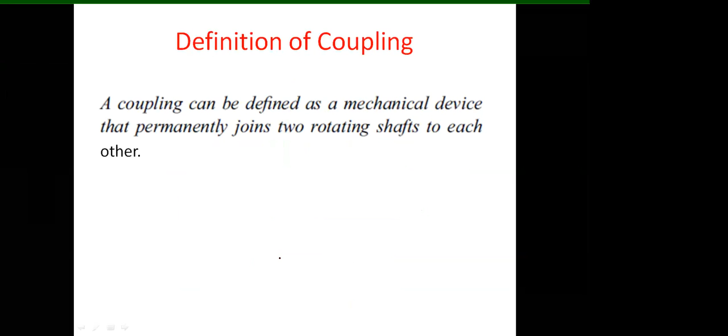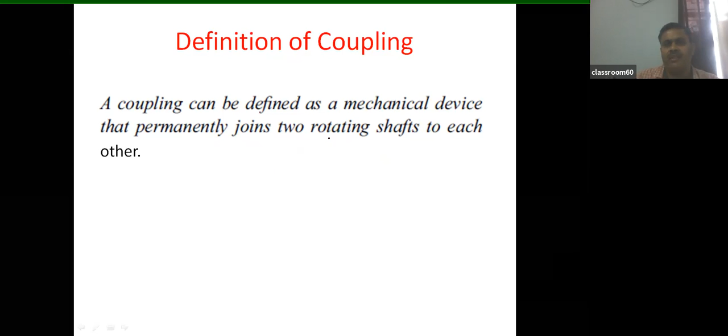First, let's define the coupling. A coupling can be defined as a mechanical device that permanently joins two rotating shafts to each other. The shafts may be collinear, parallel, or at some angle. So the coupling joins both shafts so that power can be transferred from one shaft to the other. That's the basic definition.

So here this is shaft number 1, shaft number 2. With the help of a muff, also called a sleeve, it is basically a hollow shaft you can consider, just like a hollow shaft. So shaft 1 and shaft 2.

Shaft 1 is the input shaft, connected with the motor, so it is rotating. On this shaft there is a sleeve, this hatched portion. A key is fitted in between the sleeve and shaft number 1, this is the key. When shaft 1 rotates, power is transferred with the help of the key to the sleeve, so the sleeve also rotates. When the sleeve rotates, because the key is also connected with the second shaft, power is transferred from the sleeve to the second shaft with the help of that key.

So the elements of the coupling: there are two shafts required, one input shaft and one output shaft. This is the output shaft, and this is the length of the sleeve, given by the empirical relation 3.5D. This is the key. So shaft, sleeve, and key are the basic components of the muff coupling.

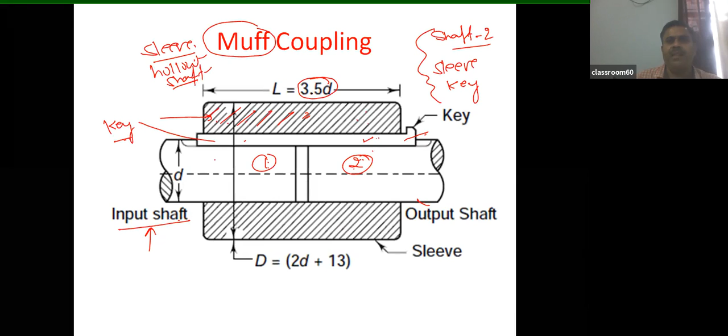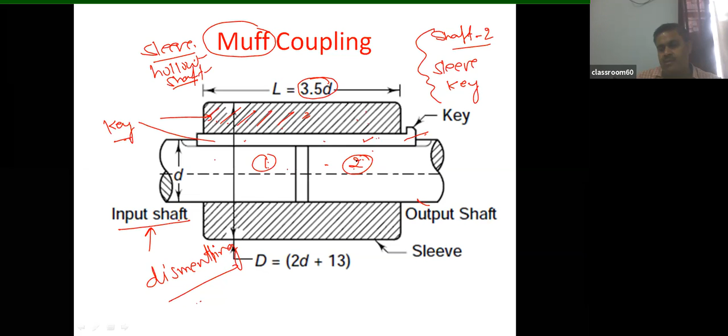In the muff coupling, dismantling for maintenance purposes was very tough and not easy, because when you have to dismantle both shafts, it is very difficult to slide the sleeve over the shafts.

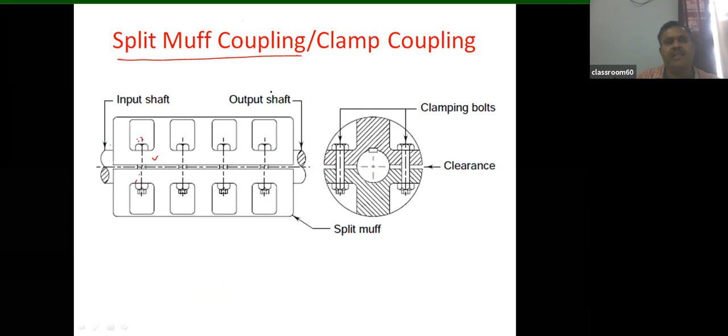To avoid this problem, there is a solution: split muff coupling. The muff is divided into two semicircular parts, connected with the help of bolts, called clamping bolts. So dismantling becomes easy, but the concept is the same. This is the split muff coupling, an advanced version of the muff coupling.

After that, there is one more concept: rigid flange coupling. In this, the sleeve is given the shape of a flange. This portion is the input flange and this portion is the output flange. Both flanges are connected with bolts.

Power is transferred from shaft number 1 to the hub or flange, this portion also called the hub. The hub is given the shape of a flange, and from flange number 1 to flange number 2 they are connected with bolts. Due to the shearing of the bolts, power is transferred from the input flange to the output flange, then from the output flange to the second shaft with the help of a key.

This is again an advanced version, easier to dismantle - the rigid flange coupling. So the components are: driving shaft, driven shaft, key, and the flange coupling with input flange and output flange. This is the side view, and this is the front view.

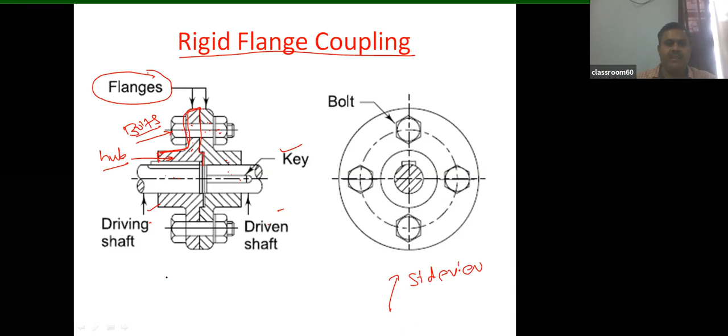Now, protected type rigid flange coupling is totally the same, only the flanges are given protection, because during operation, when there is a failure of the bolt, it can harm the operator. That bolt can harm the operator. So for safety purposes, these bolts are covered.

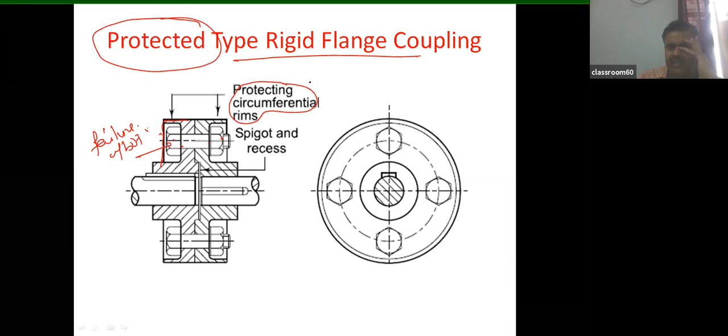They are protected by a rim, so it is a protected circumferential rim. These bolts are protected, that's why it is known as protected type rigid flange coupling. So only the safety feature is added to the rigid flange coupling, making it the protected type.

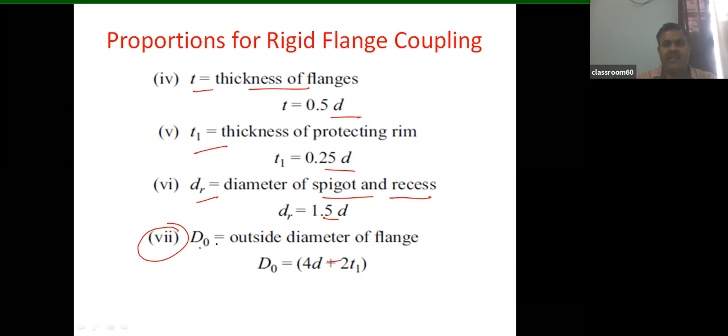Thickness of the flange, again empirical. These are all empirical relations. So how many empirical relations are there? 7 empirical relations. One is for DH, LH, capital D, small t thickness of the flange, T1 thickness of the rim, DR diameter of the spigot and recess, and DO outside diameter of the flange, which is 4D plus 2T1. We will do the numerical, then we will use these formulas.

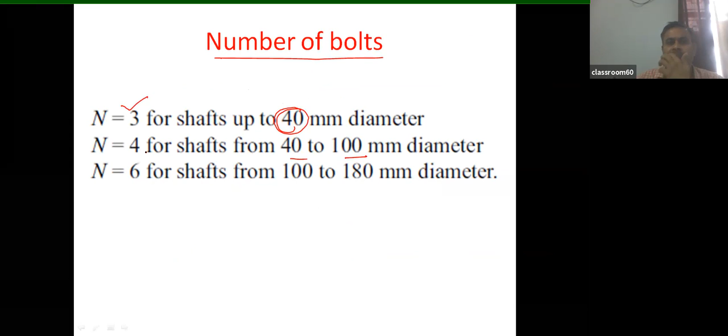How will we decide the number of bolts? If the shaft diameter is less than 40 millimeter, then the number of bolts is kept at 3. Between 40 to 100, bolts are 4; between 100 to 180, the number of bolts is 6.

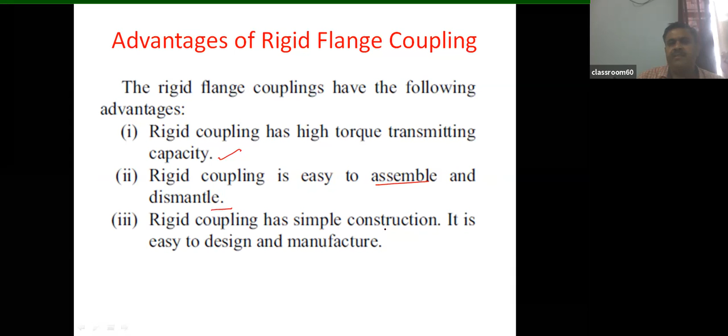Advantages of the rigid flange coupling: it has high torque transmitting capacity as compared to muff coupling and split coupling. Rigid coupling is easy to assemble and dismantle, and it is simple in construction, easy to design and manufacture.

Some disadvantages: it is a rigid type of coupling, it cannot tolerate misalignment. Misalignment means, suppose this is the input shaft with its center, and this is the output shaft with its center. So there is a misalignment, both the axes are not collinear, meaning a misalignment between the axis of the shafts. So when there is misalignment, this coupling does not provide good results.

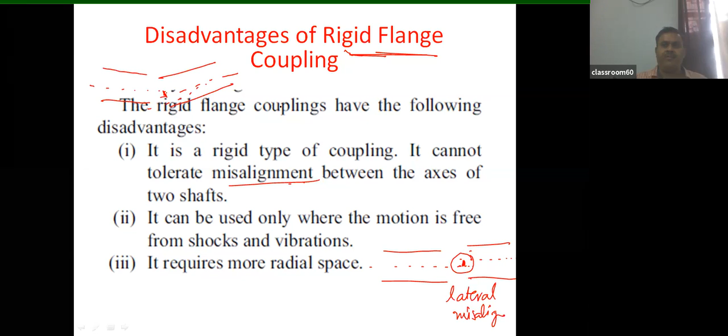This type of misalignment is known as lateral misalignment. Sometimes, suppose this is the first shaft and this is another shaft, with their respective axes having some angle between them—that is angular misalignment. There are many types of misalignment, and we will see in further slides how many types there are: one is lateral, one is angular, and one is axial misalignment.

Design analysis of the rigid coupling: there are two cases. First case is bolts are fitted in reamed and ground holes, fitted between two flanges, input flange and output flange. When the holes are reamed and ground, there is no clearance between the bolt and the hole, so there is no need to tighten the bolt.

In that case, torque is given by force multiplied by radius, where the radius is d by 2, the pitch circle diameter. So we can find the torque per bolt as force multiplied by radius, and there are n number of bolts, so this is multiplied by the number of bolts to get the total torque.

Shear stress produced can be found by force divided by area. And force we can calculate as P equal to twice Mt by dn. So just put the value of P here: twice Mt divided by dn, whole divided by area. Area is pi by 4 times d1 square, the area of cross section of the bolt, where bolt diameter is small d1.

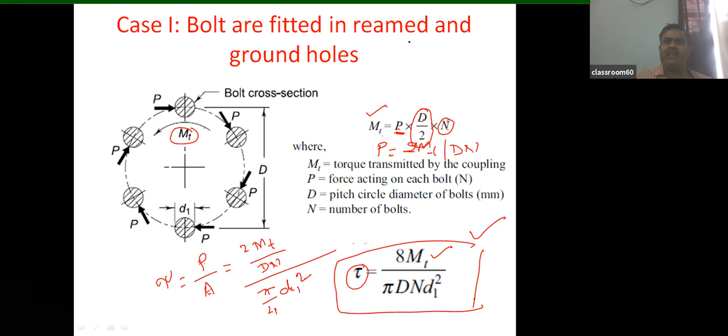So this is the shear stress produced in the bolt. In case 1, when bolts are fitted in reamed and ground holes, the power is transferred due to the shearing of the bolts. So we just have to check the shear stress for the safe design. The shear stress produced in the bolt material should not be greater than the permissible value of shear stress for that material, for the safe design. So this is case 1.

Am I audible? Now we are moving to numerical. Yes, Sandeep is there in class, Pushpendra is there. Yes sir, yes sir, yes sir.

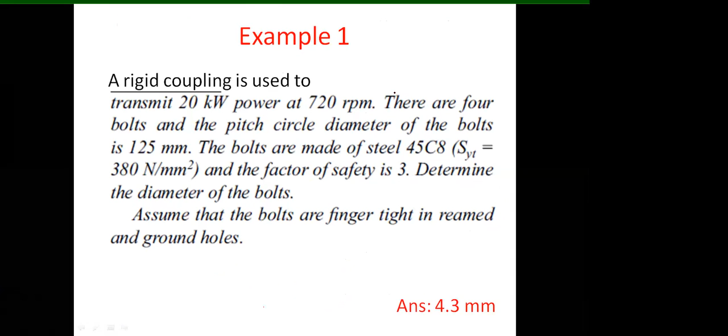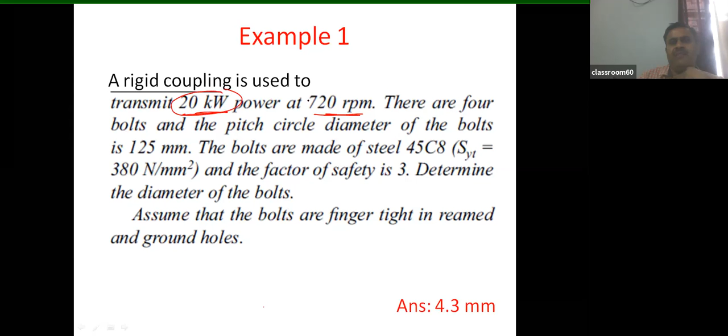Let's do one example. A rigid coupling is used to transmit 20 kilowatt power at 720 rpm. Once power is given and rpm is given, we can find the torque with the formula: 60 into 10 to the power 6, divided by 2 pi n. So n rpm is given as 720 and power is given as 20. We can calculate the torque from here.

So torque is available, please calculate this value. How much torque is coming over here? 60 into 10 to the power 6 divided by 2 pi. Kilowatt is 20, rpm is 720. Pick up the calculator and tell me the value of mt. The unit is Newton millimeter.

Yes Sandeep, calculate what is the torque coming over here. 2,65,260. Okay, 2,65,260 Newton mm, right? If it's coming in decimal, we can take that too, up to 2 digits.

So there are 4 bolts. Number of bolts given is n equal to 4, and the pitch circle diameter of the bolt is 125, meaning capital D is 125. The bolts are made of steel 45C8, so carbon is 0.45%, manganese is 0.8%. SYT is 380, factor of safety is 3.

So determine the diameter of the bolts. So D1 has to be determined, D1 has to be determined.

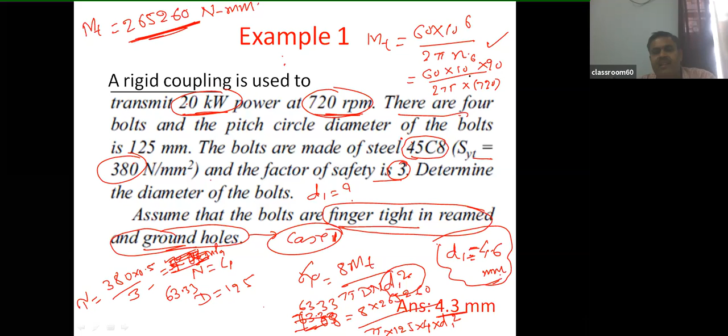When bolts are fitted in a large clearance hole, power is transferred with the help of friction. In the first case, power is transferred due to the shear resistance of the bolt, but in the second case, because bolts are tightened with the nut, both the input flange and output flange come together, they are joined and close to each other.

And due to closeness there is friction between the contact surfaces of both flanges. So power is transferred due to frictional resistance. Friction radius is calculated by this formula: 2/3 times RO cube minus RI cube, where RO is the outer radius of the flange and RI is the radius of the recess.

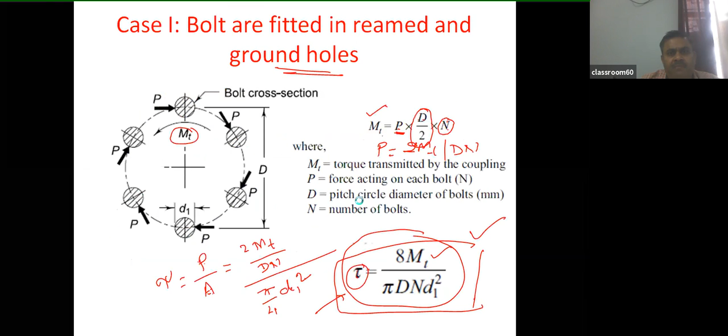You can see this in the diagram, which RO and RI radii are. Let's come to the diagram first. So what is RO and what is RI?

Now we are working on the second case. In this case, there is a clearance between the bolt and hole. Due to that clearance, these nuts are tightened. Due to tightening of these nuts, both flange number 1 and flange number 2 come together, close to each other. Due to closeness, there is a contact area between both flanges.

So what is that contact area? The contact area is this much, you can say this is the contact area. Both sides are in contact.

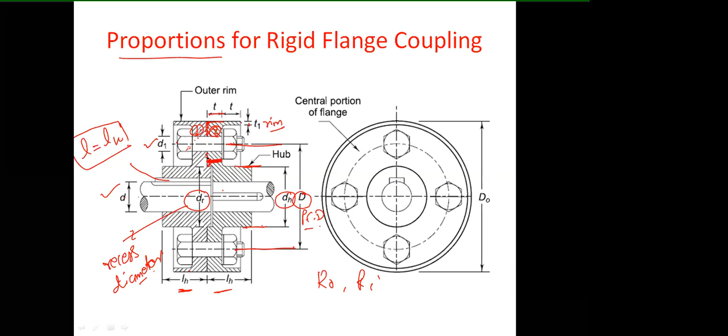This is the outer diameter. So DO is the outer diameter, that is D. DO is the outer diameter and half of DO is RO, this is half of DO.

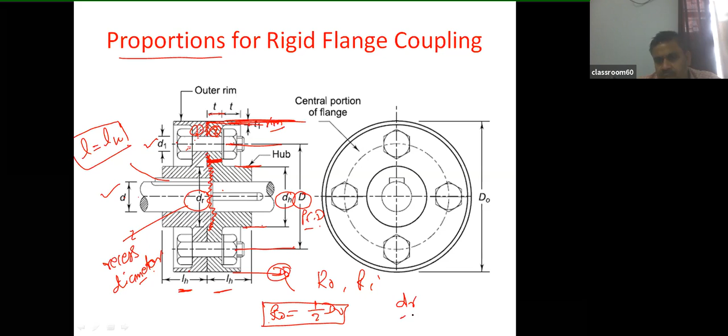So RO equals half of DO, and this is the recess portion. This radius is dr by 2, so this is RI. Now both are circular portions, so friction radius can be calculated by this formula.

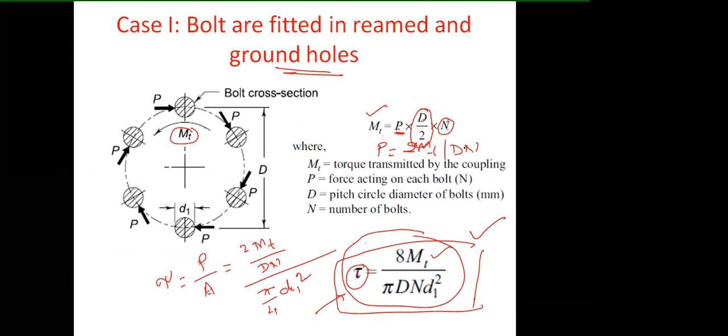So how do you calculate torque? Torque is given by PI, the initial tension in the bolt, multiplied by coefficient of friction, so it is the frictional force by one bolt multiplied by number of bolts.

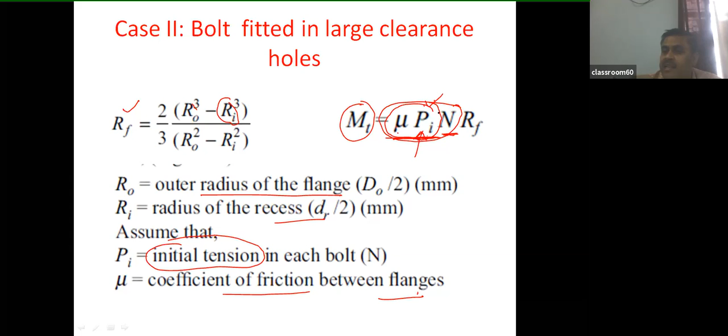Again understand: PI is the initial tension in the bolt. Tension is a force, when multiplied by coefficient of friction it becomes frictional force. Frictional force multiplied by number of bolts gives the total frictional force by n number of bolts, and force multiplied by friction radius gives you the torque.

So the friction radius formula is here. Torque can be found, and once torque is available, you can calculate other things. So let's do one example.

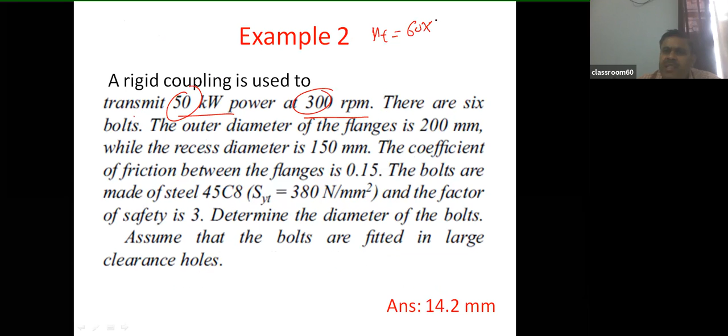A rigid coupling is used to transmit 50 kilowatt power at 300 RPM. When power and RPM are given, you can find MT: 60 into 10 to the power 6 into 50, divided by 2 pi into 300. Solve this and tell me the value.

The outer diameter of the flange is 200 mm, so outer diameter DO is 200, it means RO equals 100 mm. While the recess diameter is 150, so dr is 150, it means RI is half of dr, so it is 75 mm. When RO and RI are available, I can find the frictional radius.

RF is given by 2 by 3, RO cube (100 cube) minus RI cube (75 cube), divided by RO square (100 square) minus 75 square. Just solve and tell me what the frictional radius comes to, and also tell me the torque.

Sir, the torque is coming to 1591549... 549.43 Newton mm, that is the torque. Okay, now let's come to the frictional radius.

The coefficient of friction between the flanges is 0.15. 88.09 millimeter is coming sir. The unit is millimeter, yes sir.

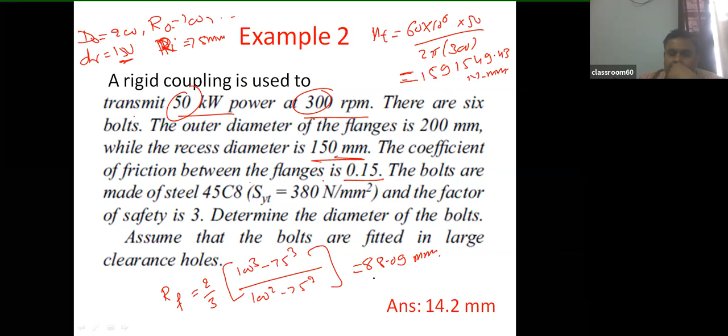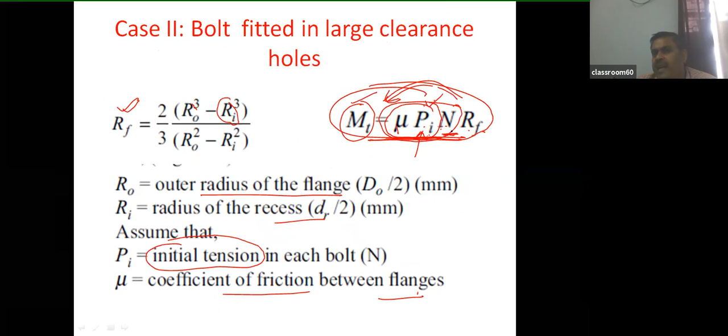Because it is radius, so now MT is available, RF is available, and we have the general formula for the second case. This formula is given in the data book: MT equal to mu PI N RF. We will use this. So I have MT equal to mu PI N RF.

So RF is given, it is 88.09, we have calculated. N is the number of bolts. Try to see what bolts are given here. Yes, there are 6 bolts. Read the first line, there are 6 bolts. So N equal to 6. So RF is available, N is available.

Now mu is the coefficient of friction, which is also given as 0.15. So mu is also available. MT you have already calculated. How much is it?

15,91,549.43 Newton mm. So MT is also available, mu available, N available, RF available. Only PI is not available. So you can calculate PI from here.

You can find PI from here, the initial tension in the bolt. If this initial tension in the bolt has some limit for safe design, this PI should have some limit, so calculate PI first. So 20073.65 is coming. The unit is Newton because it is a force.

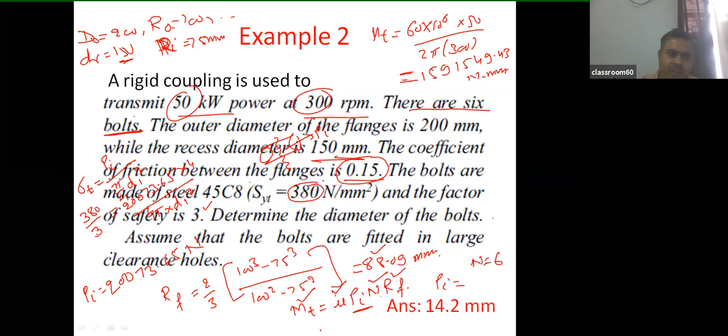PI you have already calculated as 20,073.65 Newton, divided by pi by 4 into d1 square. So only the unknown is d1. Just calculate d1 from here.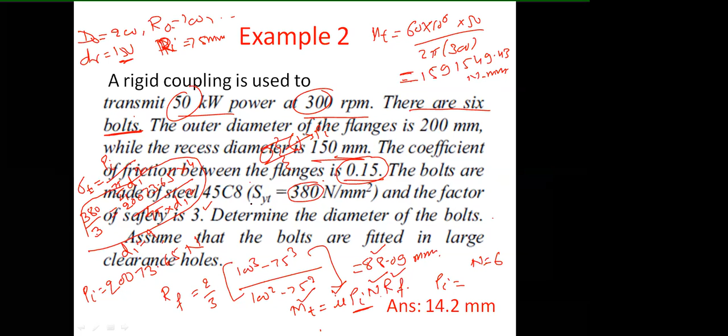14.2048. Yes, so our answer is correct. 14.2 millimeter. The answer is over here.

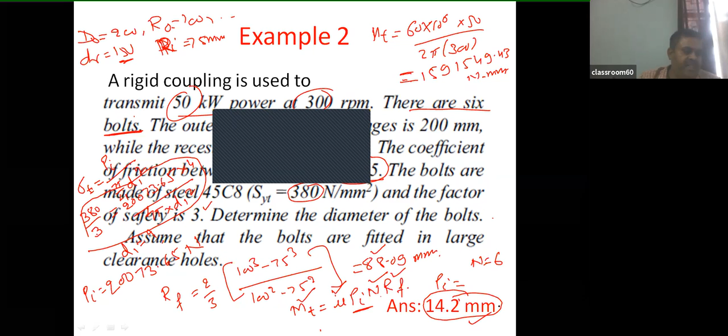So these are the two examples, I think it is sufficient for today. In the next class we will do the design of the full coupling - by full coupling I mean you have to design the shaft, the key, the hub, and the bolt also. These all four components have to be designed.

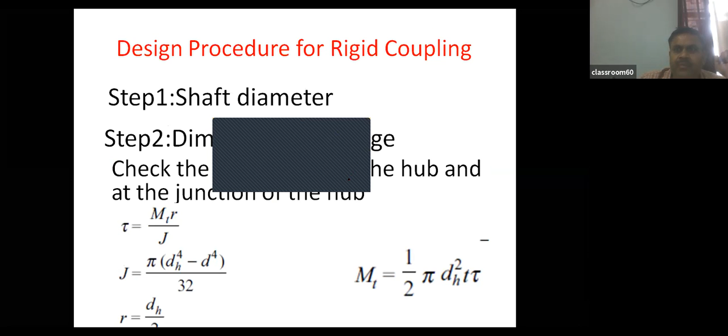Yes. Sandeep, clear everything?